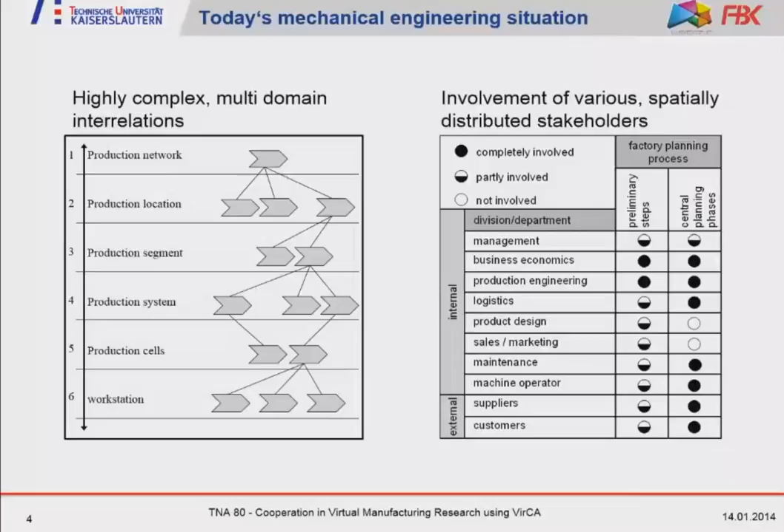On the other hand, a lot of different people are involved in today's mechanical engineering solutions. So when you're trying to develop a production system, when you design a factory, not only the factory designer, but also some product responsible persons and a lot of other people are involved in such a planning. And therefore, the working conditions in mechanical engineering offer different challenges.

On the first side, due to the involvement of different people, a lot of different points of view need to be integrated into one solution. Every involved person is trying to solve his own problems, and has a very special point of view on some very detailed aspects within the planning problem. This is also dealing with different personal objectives.

For instance, the guys dealing with logistics have to ensure a fluent material flow throughout the factory, whereas product responsible persons are more or less focused on the proper design and implementation of products. In the end, also different know-hows and different experiences have to merge together to create a holistic solution.

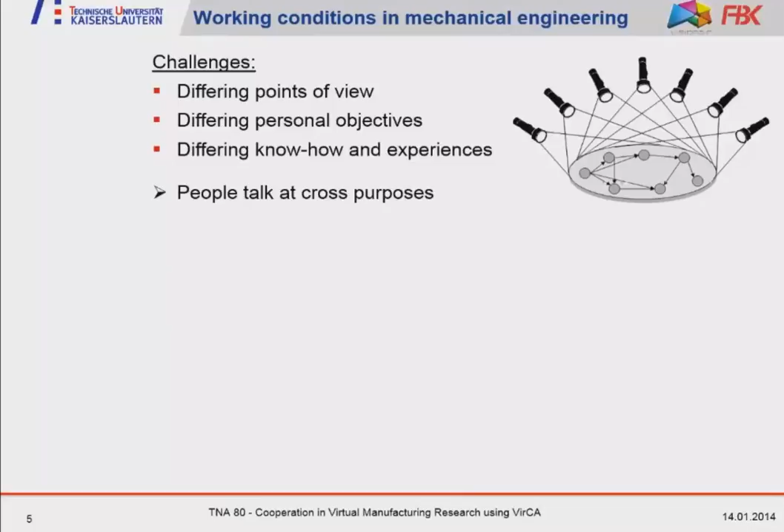But also challenges arise from that, because when different people come together and everyone tries to solve their own problems, it's very easy that people talk at cross purposes.

In the end, due to the fact that the problems in mechanical engineering and factory planning are very complex - if you think of a complete layout plan for a factory, a lot of decisions need to be done - problems are very, very complex, and you have to tackle this complexity. You have to involve all the several domains which are involved, and in the end, an isolated solution is not suitable to fit all these problems. So the problem solving must be a collaborative process. And this is one part of the motivation coming from the mechanical engineering point of view.

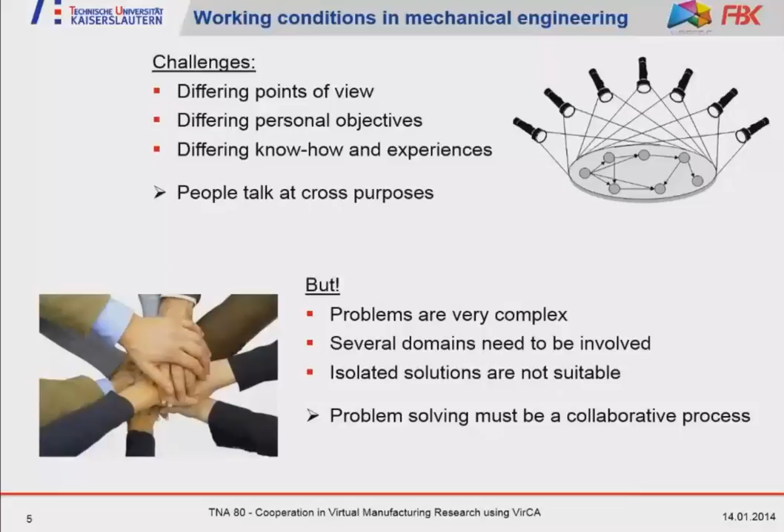In this mechanical engineering domain, a lot of IT tools have been introduced to solve these problems. Maybe you know the digital factory approach, that beginning from one single product to a complete factory, all the planning should be tackled by digital tools, and the information exchange should happen and work in a proper way. So digital tools are available, but for virtual reality cooperation, they often lack supportive features. Real collaboration within virtual reality is not ensured, it's not granted by these mechanical engineering IT solutions.

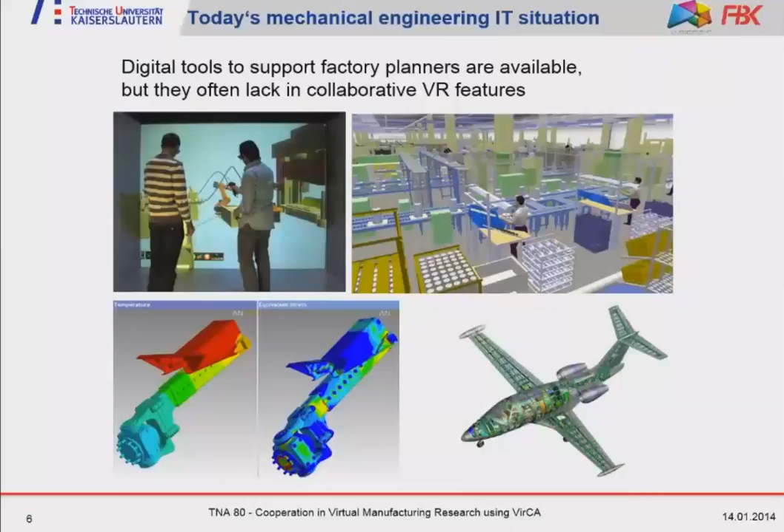So this is a problem of today's IT situation for mechanical engineers. But what is the proposed solution? The proposed solution is that researchers in the range of virtual reality develop their tools, develop their software systems, which ensure the connection between different virtual reality systems, so that multiple caves, for instance, are coupled together, and that spatially dislocated people can work together as if they were co-located.

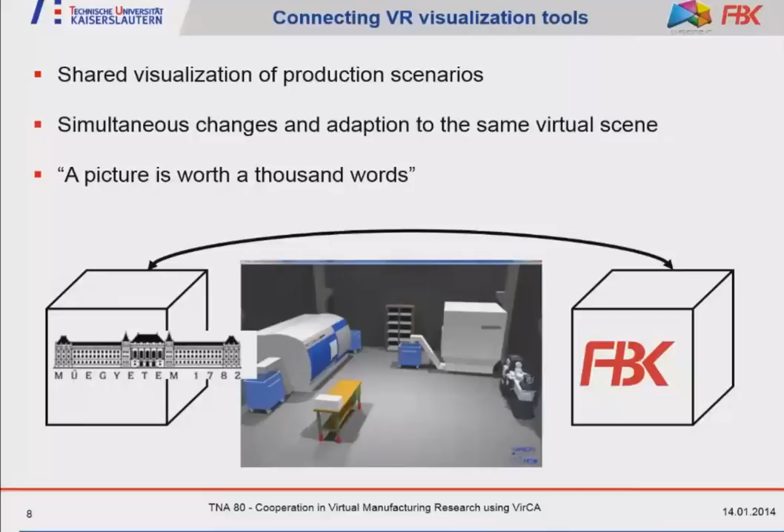And with this in mind, we created a working plan. We created a working plan which was quite detailed and which requested some effort from both sides, from our guests and from us as hosts as well.

In detail, the working plan looked like this: the user, Peter Galambos from the Budapest University of Technology, provided software know-how because he and his team are software specialists. They developed the VirCA software based on their systems, and they also had first experiences in this distance collaboration thing.

So in the end, they provided the software know-how and requested the counterpart to test out if their software, their programming and the ideas behind it, can work on another installation, another virtual reality setup that was not integrated into the whole development process of the software tool. So we, as host, delivered use case specialists to validate the distance collaboration approach against the industrial-like use case.

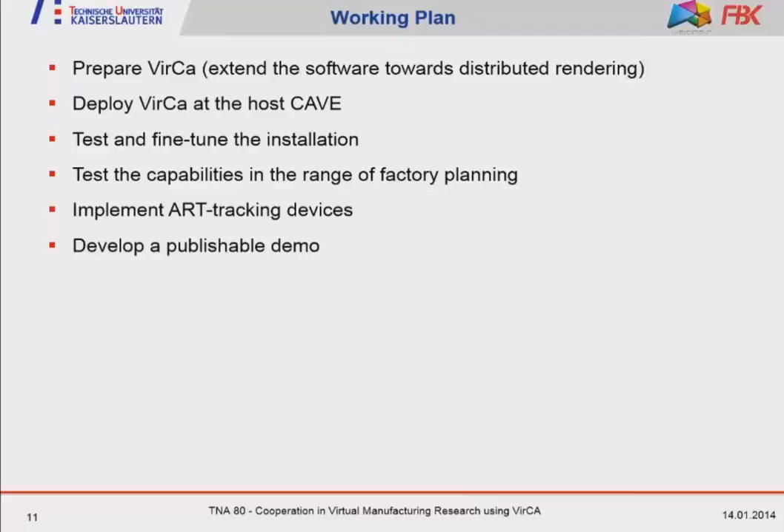The implementation of our tracking system was also new to the software, and this was also done during the TNA. In the end, we developed a publishable demo. So that was the working plan, and we executed this working plan.

This needed to be done during the test-out. The first period started with the deployment of VirCA at our cave system and testing and fine-tuning the installation. This was about a week-long workshop to test out if the extended software was able to run, and to bring the academic prototype out of the original developer's lab.

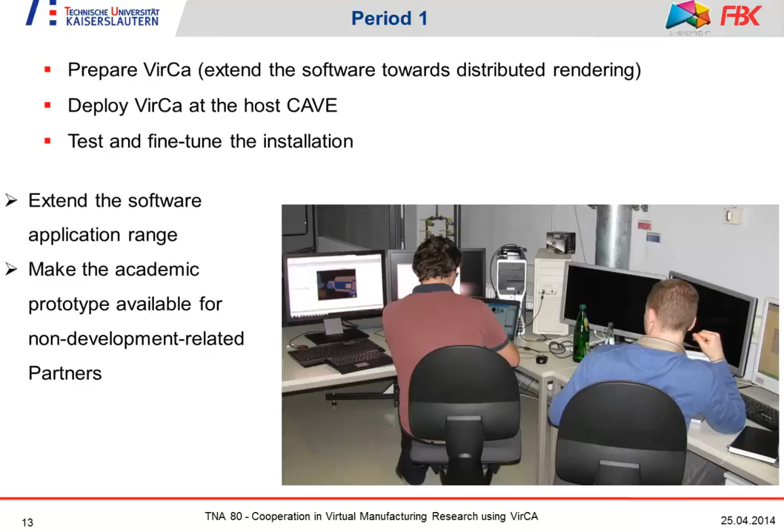In the second period, we started with this running setup and tested out the capabilities in the range of factory planning. We implemented the ART tracking system, and also the use case, the modeling and the interaction capabilities.

The development of a publishable demo - the concentration of all the tests we did - towards a very focused demo that showed all the capabilities and all the interaction within a very compressed time frame, was in the end the major output of the TNA.

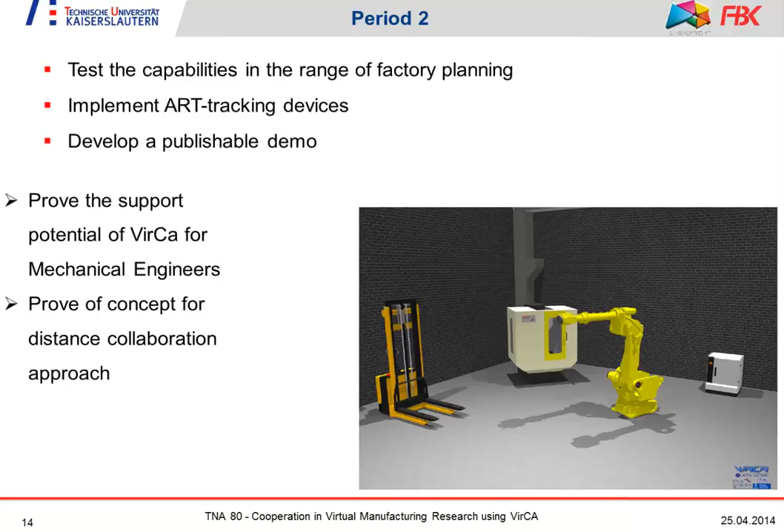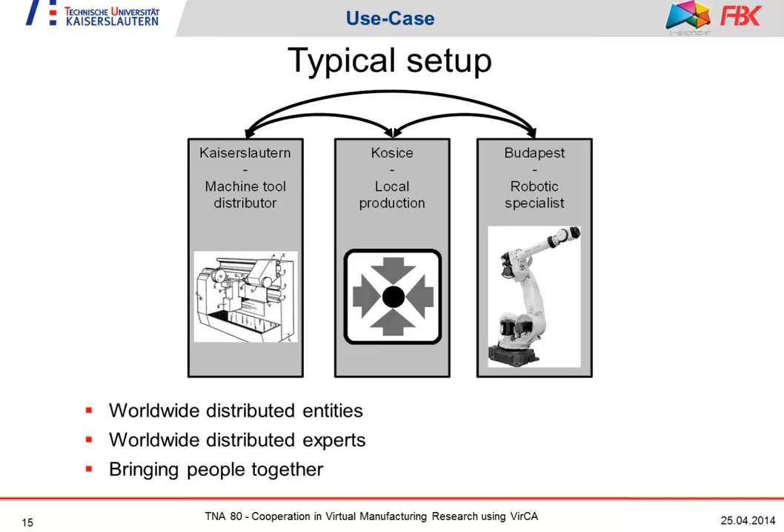This use case, this typical setup you have seen during the last General Assembly or during the CogInfocom conference, where we had this live demo running without any bigger problems, showing quite a wide range of researchers how we extended this software tool, how we deployed it to a laboratory that was not involved in the development of the system itself, and how we can bring different planning participants together to work in one virtual environment, and even connect physical objects like machines or robots to this interactive setup.

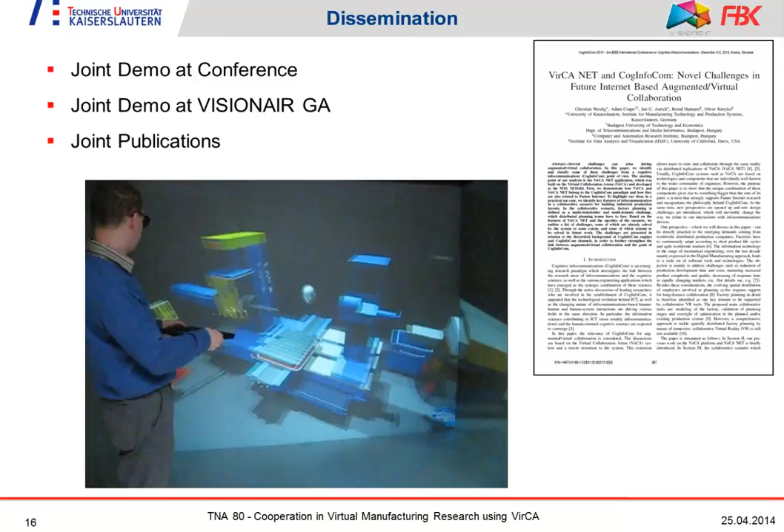Concluding, the dissemination for the TNA went in a range that we had joint demos and papers at the CogInfocom conference, we had some joint demonstration at the Visionair General Assembly, and we're right at the moment under submission for a joint international journal publication to bring the results and the whole process to the research community in the end.

I would like to ask a short question about your own impression with VirCA and the rapidity to develop the connection in Kaiserslautern. Was it complex to make this setup in Kaiserslautern? And what is the openness of a plugin or of a system you developed for that? So it has been created for a single demonstration? And if we want to apply another use case than the demonstration you created, what will be the effort to make the adoption?

The implementation of the software at our system was, I think, not that complex. I think for sure the people from Budapest who have been involved in development, with their help, it was quite a fluent process to install the program. I think they have done a lot of preparation stuff to make the software deployable to our distributed rendering system. For that, I have no idea how much effort it was.

The effort to implement the system here was more or less testing out and fine-tuning the configuration. So if you know the process, and I think also now they could gather some experience in deploying their tools to foreign systems, with this experience and virtual reality tool systems which are quite similar, they can do some deployment within, let's say, 2 to 4 days. So it's for sure nothing you just press the button and it's installing and everything's perfect, but I think deployment is not that complex.